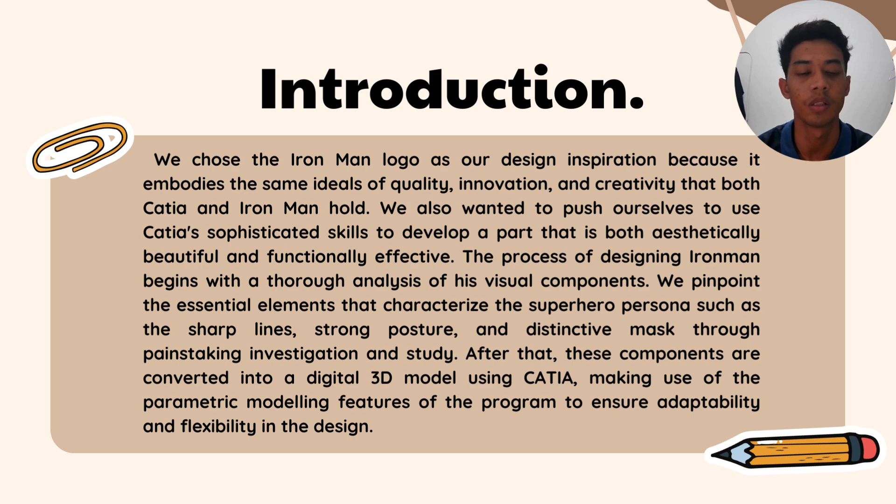Next is the objective. The first objective is to convert the design model precisely and accurately into a real prototype. Second, improve the machine prototype surface, polish, and overall part quality. Third is to ensure a productive and error-free production process.

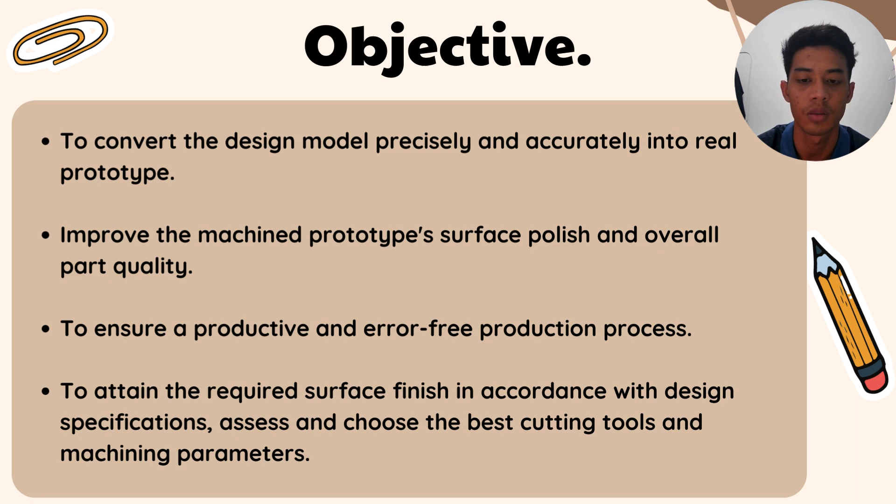The last objective is to attain the required surface finish in accordance with design specification, and to assess and choose the best cutting tool and machining parameters.

Methodology: this is the process flow when we run the whole project. First, we create the model from SolidWorks modeling. Number two is part verification. Number three, technical drawing. Number four, we transfer the model to CATIA V5.

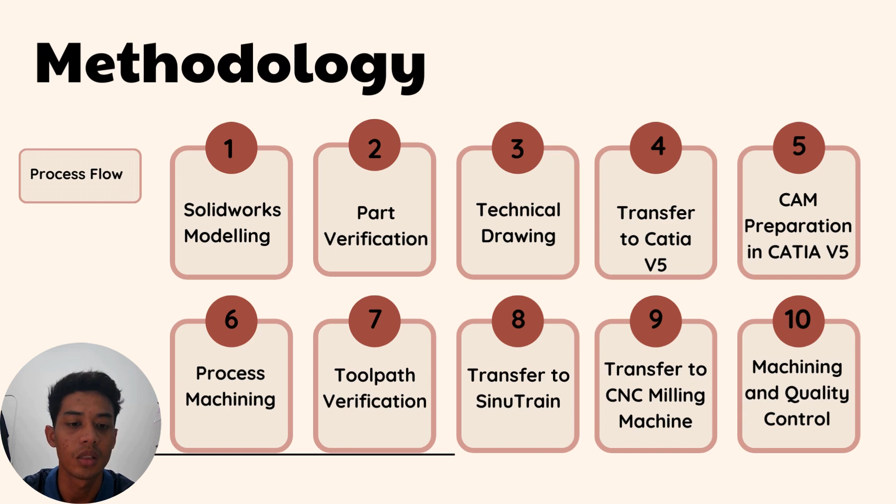Number five, we did the CAM preparation in CATIA V5. Number six, we go through the process machining. Number seven, tool path verification. Number eight, we transfer the coding to SinuTrain. Number nine, we transfer to the CNC milling machine, and the last is we did the machining and checked the quality control.

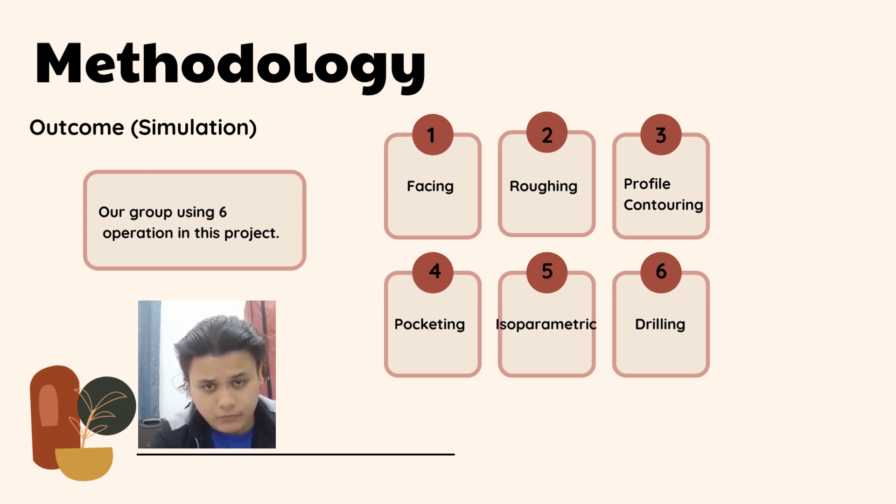And then we use isoparametric, which lets us cut the face strip aligned with the isoparametric lines. Lastly, we use drill deep hole because we want to make a hole in our product. Lastly, you can see here our product for the final simulation.

Dimension accuracy refers to how close the measured or machined result is to the true or target value. Tolerance refers to the acceptable deviation from the target value. In CNC machining, these terms are important for ensuring the quality and functionality of the machined part.

Different machining processes have different levels of accuracy and tolerance. For the result, we can see that the Stark Iron Man reactor has some tolerance for the top view.

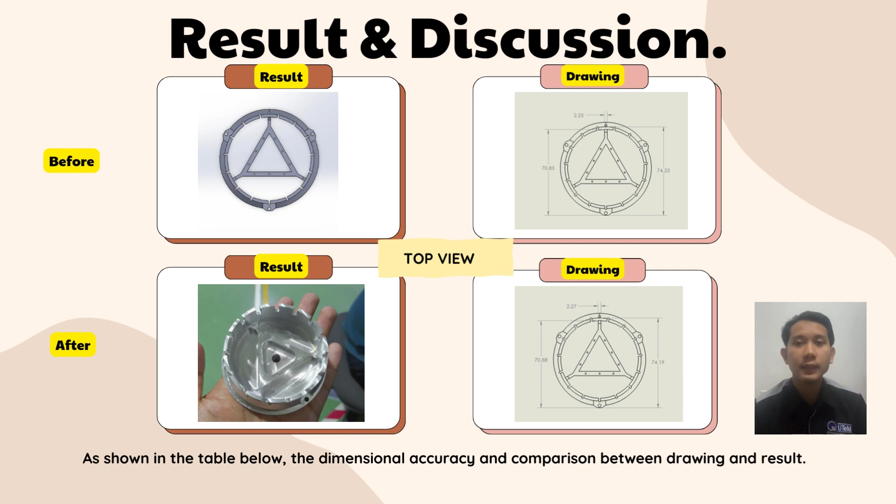First, we can see 2.25 mm, 74.23 mm, and 70.85 mm in the drawing, and after machining we get 0.02 mm, 0.03 mm, and 0.04 mm tolerance for this part. But this tolerance can still be acceptable for the Stark Iron Man reactor.

For the side view, another part still has some tolerance. We can see at the drawing the before and after results for the side view.

I can conclude for this slide that the acceptable tolerance in CAM advanced machining depends on several factors, such as the part design, the material properties, the machining parameters, the machine tools, and the quality standard.

Generally, the tighter the tolerance, the higher the cost and the longer the cycle time. Therefore, it is recommended to use the minimum tolerance necessary for the part to function properly and to avoid over-specifying the tolerance for non-critical features. One way to determine the acceptable tolerance in CAM advanced machining is to use tolerance-based machining, which is a feature of some CAM software such as SolidWorks CAM.

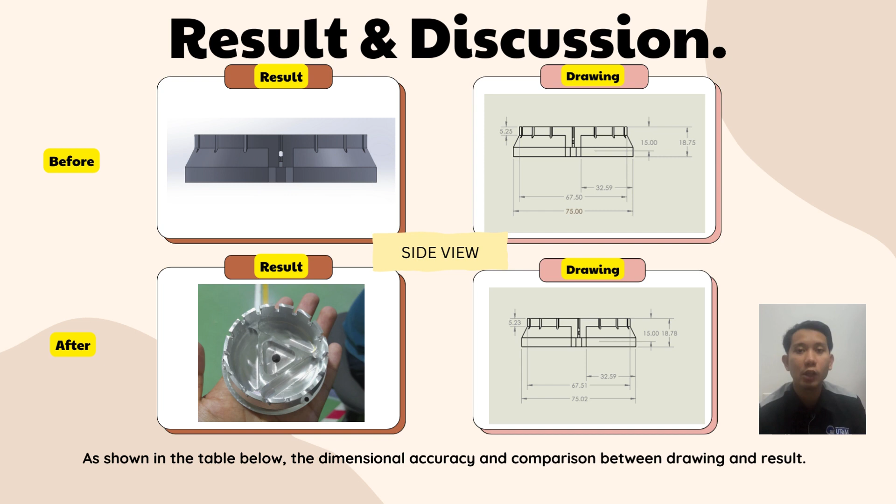Tolerance-based machining uses the dimensions and tolerances applied directly in the 3D model to generate the optimal tool path and cutting parameters. This way, the CAM software can automatically adjust the tolerance level for each machining operation based on the part geometry and the machine capabilities.

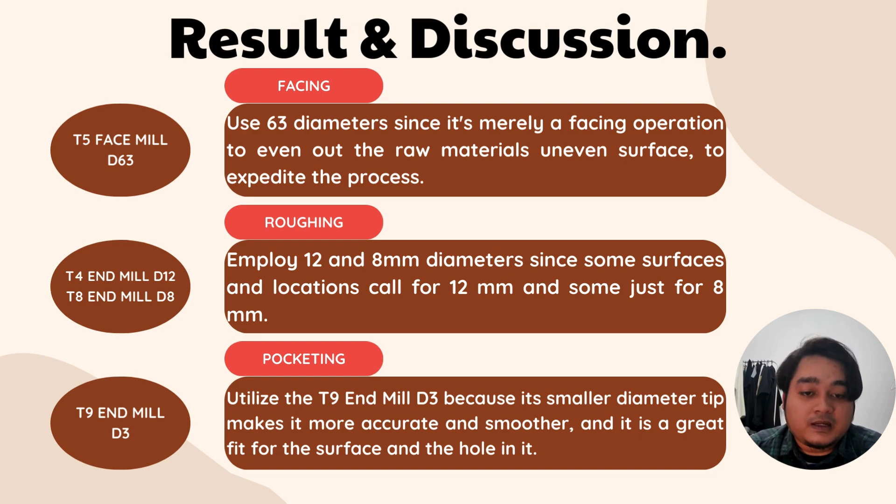After that, for the pocketing process, we use T9 end mill D3. We utilize this tool because its smaller diameter tip makes it more accurate and smoother, and it is a great fit for the surface and the hole in it.

For the next process, we use T2 ball end mill D6 R3. It is used for the isoparametric operation because it has a rounder tip and is smoother. With additional programs, this tool will gradually trim the surface of the reactor to make it look more beautiful.

For the profile contouring, we employed two cutting tools: T9 end mill D3 and T10 end mill D6. The reason is that certain sections require a smaller point to prevent violation on small surfaces, and we also use end mill D6 to provide profile contouring on larger surfaces in a speedier manner.

The last one is the drilling process. We use two cutting tools, T11 drill D3 and T13 drill D10. This is because certain holes have a diameter of 10 and some holes require the use of a 3mm diameter point, due to the fact that drilling requires an exact diameter because it cuts vertically and consecutively.

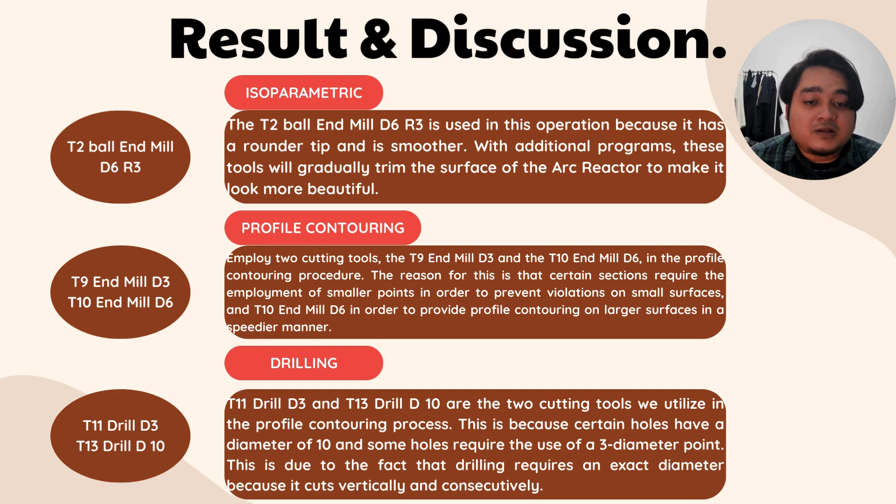Next is about surface finish. The workpiece surface differs slightly from the drawing because we programmed a second operation in CATIA to create pocketing and facing on the lower surface. However, because the machined upper surface has a different axis system and cannot be clamped, we refrain from using the second program during machining.

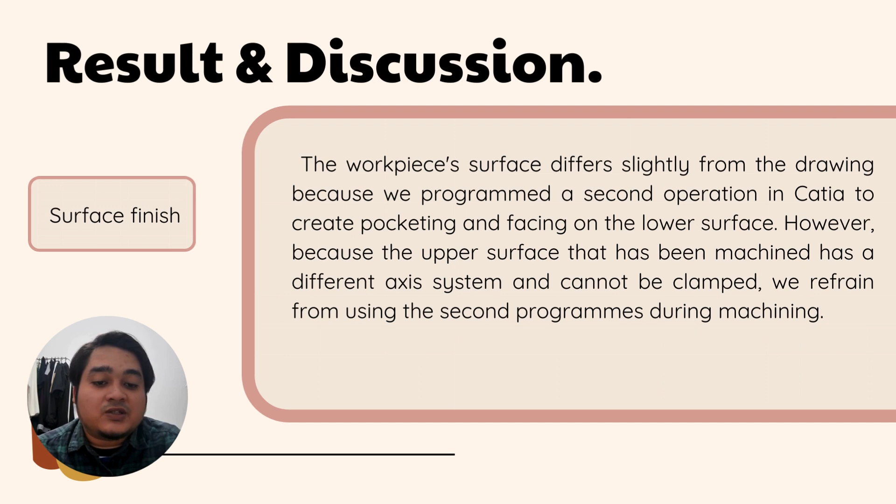In conclusion, I have shown you how I use CATIA, a powerful computer-aided manufacturing software, to produce a replica of the Iron Man ARC reactor. I have explained how CATIA simplified the production workflow by modeling the manufacturing process, optimizing the toolpath, and producing efficient G-code.

I have also demonstrated how CATIA improved the accuracy and precision of the CNC machining process at every stage, resulting in a high quality and realistic replica. Furthermore, I have highlighted how CATIA shortens the production time and decreases material waste, which are both financial and ecological benefits of using cutting-edge CAM technology.

Finally, I have discussed how this project has implications for future manufacturing projects, as it shows how data-driven CAM can enhance the capabilities of CNC machining and set new standards for the industry. Thank you.